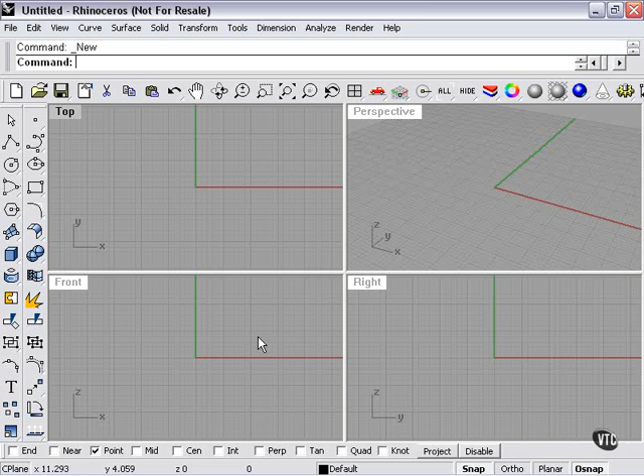In this section, we're going to continue talking about our curves, and specifically we're going to get into editing points of curves.

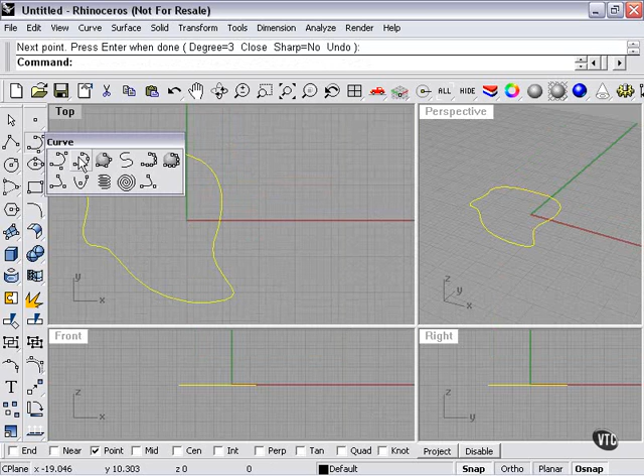Now for that, I'm going to create two different curves. One is a control point curve, as you saw there. For the other, I'm going to use an interpolate point curve. I'll allow both of these to be closed curves. Now I'll turn on my control points button by left-clicking here.

As you can see, even though I used an interpolate curve tool, my control points are actually not exactly on the curve. And our control point curve looks similar.

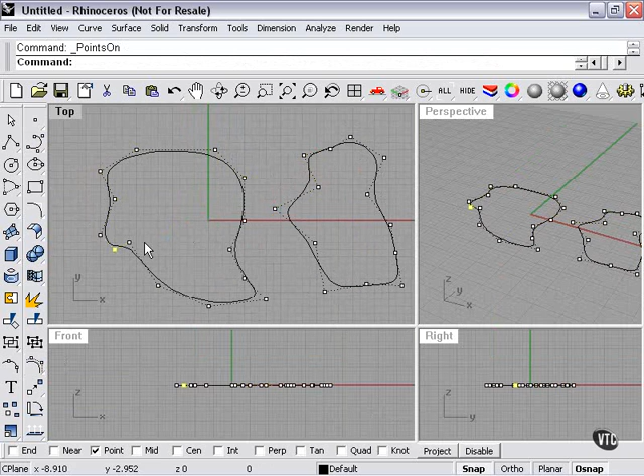I can grab each of these points by left-clicking and holding the button down and moving it around. This is going to change the shape of our line, changing our curve.

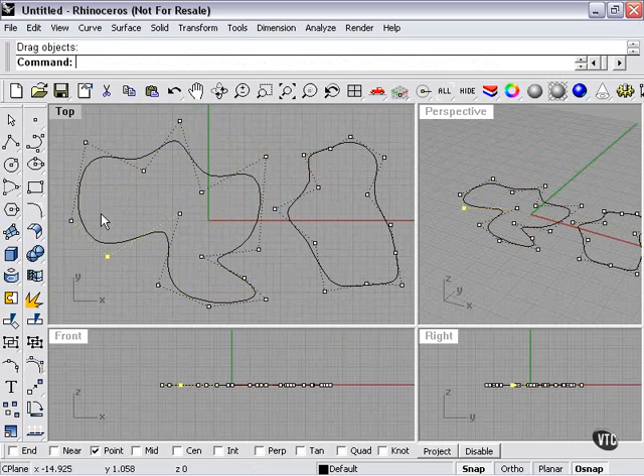I can also select points and use the delete key to delete them. I can draw a box around several points and use my delete key there. Editing points of line segments or curves is extremely simple.

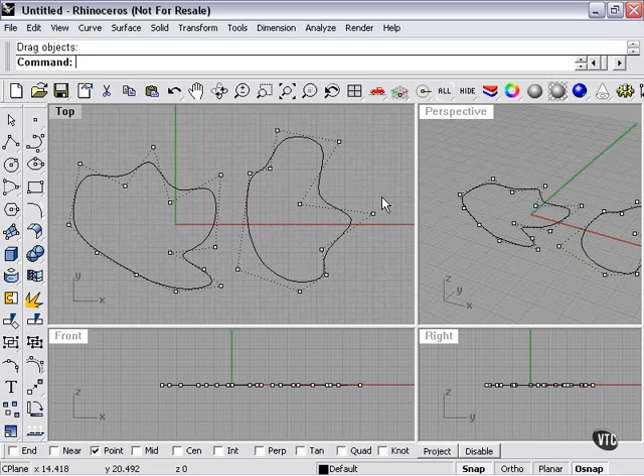But for example, what if I deleted more points than I wanted to delete? This leaves me with only 7 in this shape.

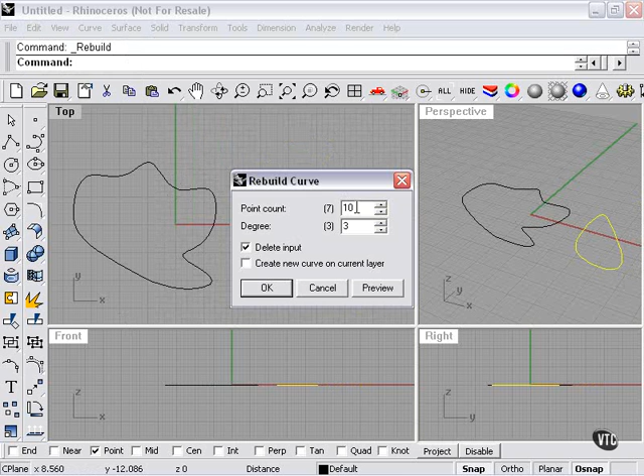Well, let's turn off our points. Select. Let's go to Edit, Rebuild, Point count. Here I can add some points back in. So let's say 10. Now the shape has not changed, but if I turn on my control points, now I have more points to work with.

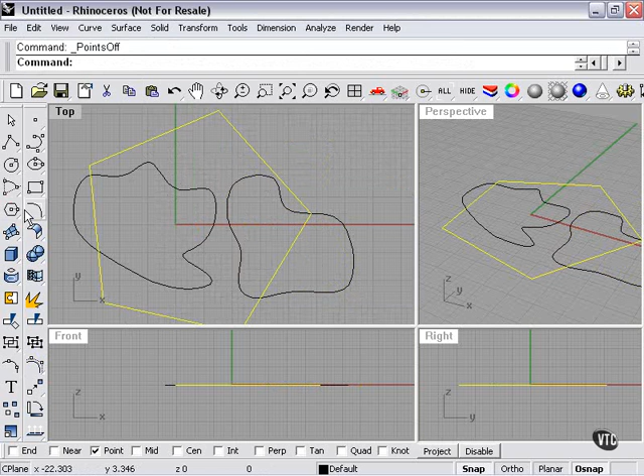Again, control points on. I can also use some of my editing tools on control points. In other words, my scale tool, for example. If I right-click for a 2-dimensional scale here, this can actually draw my points together or force them further apart.

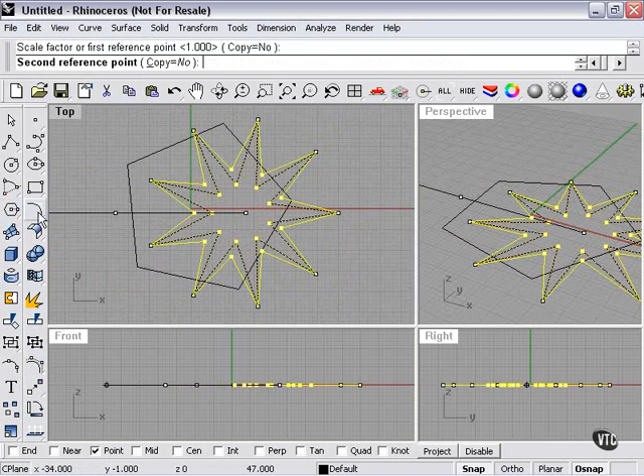I could also use my rotate tool. As you can see, that's kind of twisting the points to the left or right. Turn my points off here. And so we've changed the shape of our star.

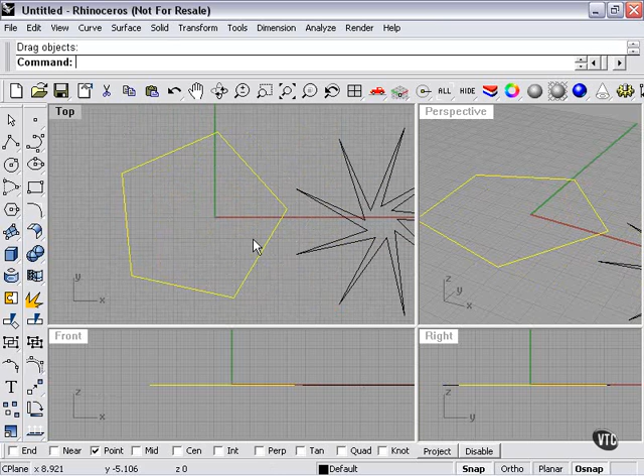Now some shapes, like this one, a nice 5-sided polygon, have very hard edges. I have only 5 points to work with here, and I certainly have the option of rebuilding it. But if I do that, as you'll see, it softens considerably.

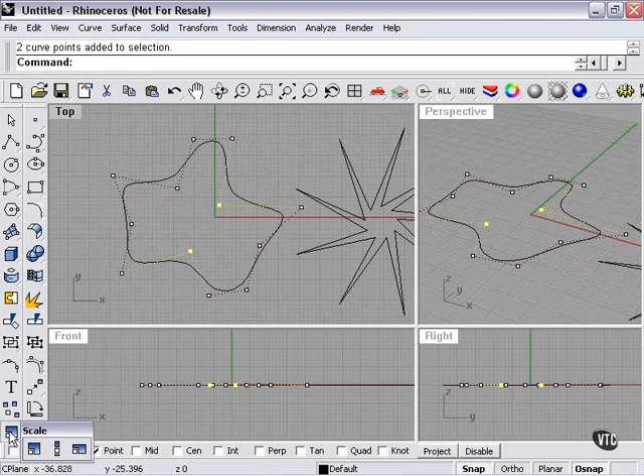Turn on my points. And again, here they are. You can also select 2 points, and even use your 1-dimensional scale. I make a line that goes right along with the 2 points. You can draw them closer together, spread them further apart.

I can select all the points in a shape and do a 3-dimensional scale to simply make the shape bigger or smaller. I can hold down my control key and click points to deselect them or reselect.

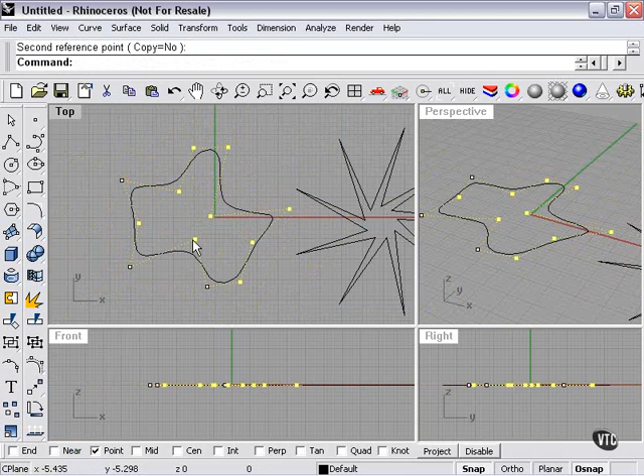If I hold my shift key, I can add points. I can then add, by drawing a square, other points. Now if I hold my control key, I can draw a box to subtract.

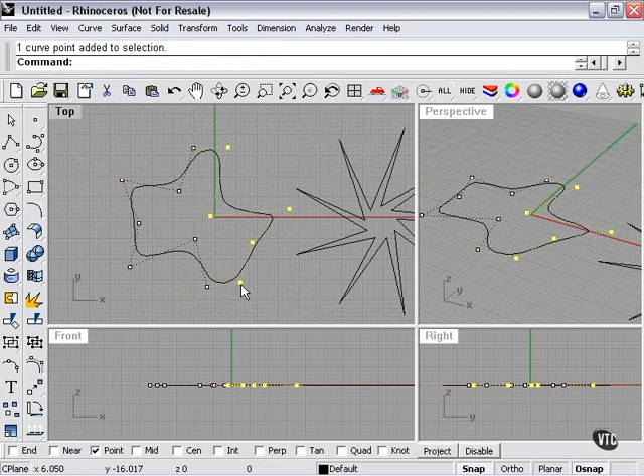So it's important to remember that control points can always be turned on for any curved or line shape, which will allow you to really edit your work.